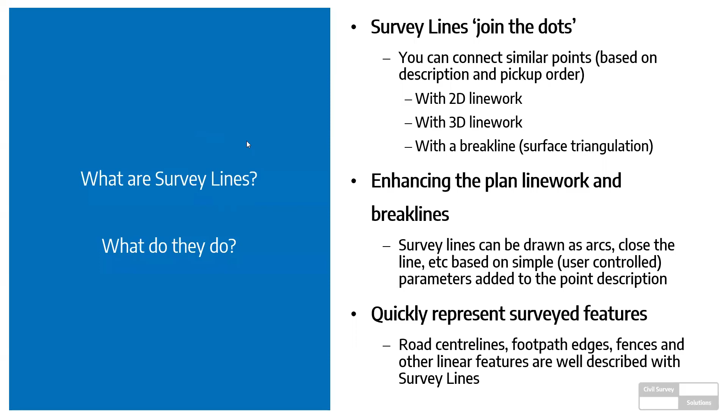Okay, so just moving on with this PowerPoint, I've got one more slide to show, and then I'll get in and show you the toolkit. In terms of importing survey data, the process for doing it in Civil Site Design is similar to what you would do in other software.

You have a point file, which is coordinated geometry with normally potentially a point number, an easting and northing, usually elevation, usually description. You may have other fields. We have a tool to import those points, and you basically tell the software how you want to configure or read in the information. Nothing unusual if you've imported points into Civil 3D or Stringer Topo even — it has the same sort of setup.

When the points come in, they'll be represented on different layers. They can have different symbology, and I'll talk to you briefly about how that works. Essentially what we're doing is letting you create blocks of your own choosing. They have attributed text, and we're just setting up a mechanism to populate that attributed text with the real properties of a point. Once you've got your points in, if you're looking at building existing terrain data, the thing that's missing really are the break lines and the line work.

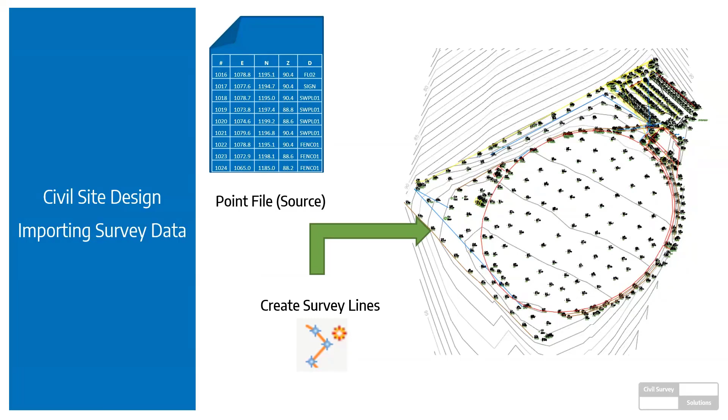So the next part of that puzzle is to create survey lines. What this will do is look at the codes—there's a code set for you to choose what you want based on the description—and then it goes through and makes those connections for you. There's a bit to talk about with survey lines on how you can configure and rearrange the line work if it doesn't work, getting rid of overlaps and that sort of thing.

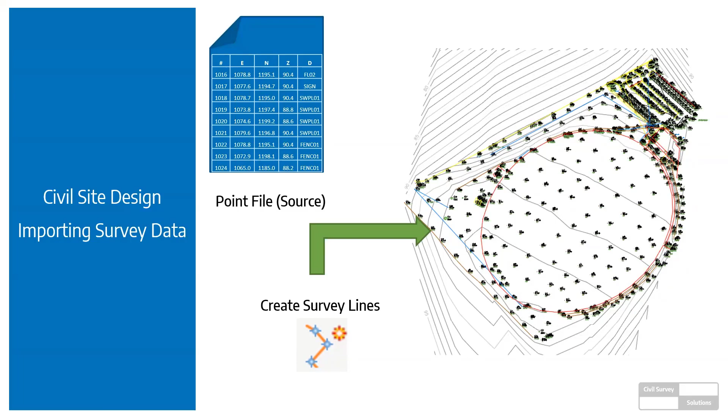Coming out of that, the survey lines, when you make them, become 2D polyline, 3D polyline, and breakline. So the other part of the equation is you decide that this is a linear feature you want to include in your terrain. That's what happens in a survey framework to build an existing surface.

When it comes to design, the same sort of rules can apply. Civil site design points can be referenced to your design elements, so you can actually link elevation information to a road centre line or a daylight batter in code. You can then have that information updating as you move your main design around. But then you could put that in a surface, create survey lines, and add them as break lines.

So I'm going to talk to you on two fronts. One is how you would bring in a coordinated survey and quickly set it up so that you can go and design. And then I will show you some of the uses of civil points from a design perspective.

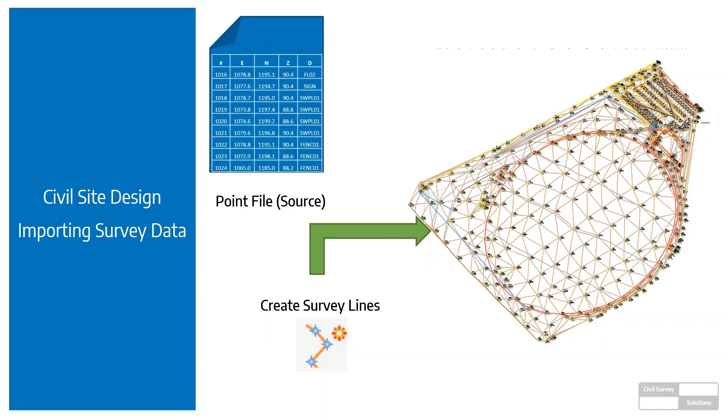Okay, so today I'm working in Civil Site Design Plus, which is inbuilt with AutoCAD. The functionality you see today is exactly the same as what you would see on BricsCAD. In Civil 3D, the tools are absolutely there—they're sitting in a tab called Site. So instead of having a tab called Surface and Alignments, in Civil 3D you have a tab called Site, and you will find the same in there.

I'm not sure if Jonathan wants to say something to me. No, that wasn't me. So wow, someone else has the power—someone else has joined the session. So yeah, no, that was a mistake.

Excellent, all good. Okay, so what we're going to do—we started with a blank drawing. The only thing actually in this drawing are some layers, and really all I wanted to do is preset some colors. If you've looked at any other Cogo point import process, you have the opportunity to normally control display based on putting points on different layers based on their description.

So Civil Site Design points work exactly the same way. All I've done here is create some layers. If layers don't exist and the software wants them, it will create them for you, but it will not give them color—they'll be white. So what you'll have is a bland looking survey, but it will create layers as it needs based on the setup.

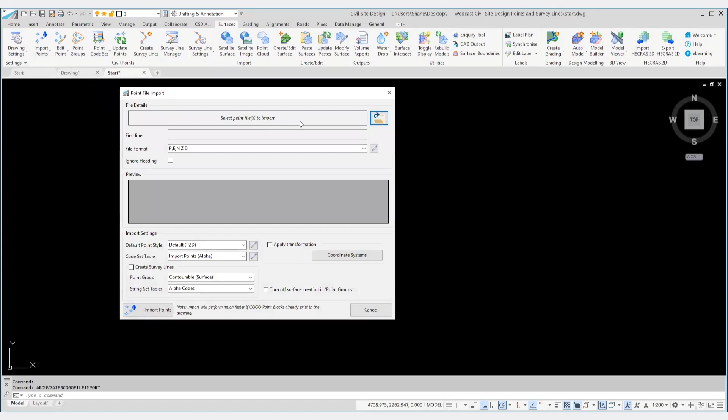When you run this command, the first thing we'll do is find a file of points. This is a fairly traditional file that I open with Notepad so you can see the structure. It's laid out as point number, easting, northing, elevation, and description, all separated by commas.

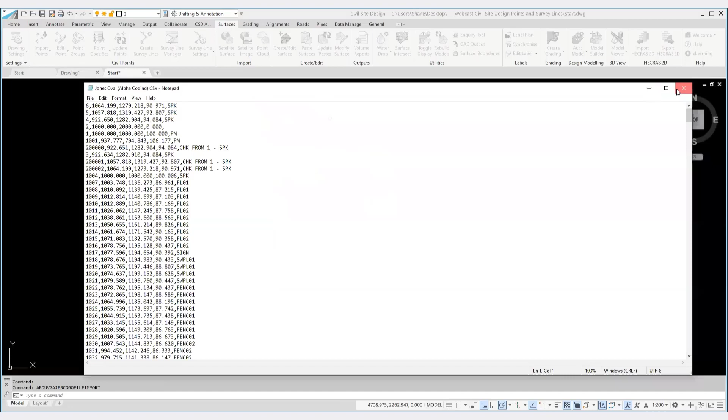So what we're going to do is grab that file. It doesn't have a heading, so we don't need to ignore anything in the file. It actually shows you what's on the first line, which gives you a feel for the framework.

The first thing to know is that when you import a file, you actually set up a file format. It's here that you tell it what each column in the file represents and what the separator is in that file.

If we had more information we wanted to pick up, some attributes, we could simply add a column and then pick what information that column represents. I do have a manually created attribute here called diameter that I could fill into that field, which would then go into the point information, which I'll talk about later. You basically get to decide your columns of information and how you want to feed that in.

This format does have a dual purpose, one of the gotchas to know. You can create formats for importing and outputting data, which is normally this sort of structure, and you can also create formats for interpreting the description of a point.

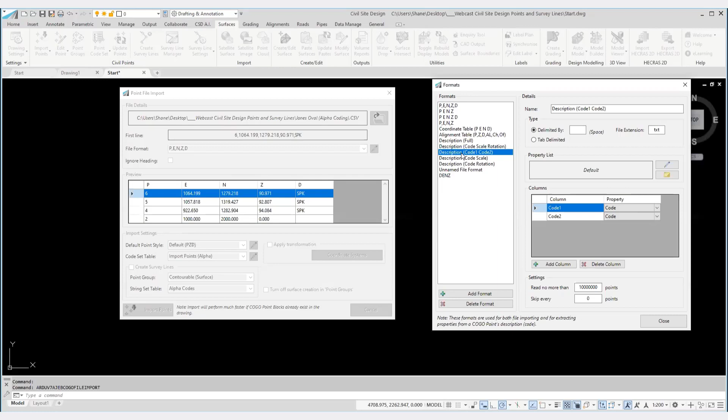So when a point gets pulled in, it has a description. That description may represent two codes of information, or it may represent a code and then a rotation or a scale. This basically lets you interpret the description and how to use that.

So I've got that, and I can see the structure looks right: point number, easting, northing, elevation, description. Then when you bring the data in, you get to pick a default point style, which I will quickly overview here and maybe talk more about later.

It's saying that I'm missing some layers. That's good - a point style is how the point looks. So when you create a point style, you pick a layer for it to go on, which you can override further down the stream.

You can also decide on the block you want to use. The block is really important because this block is your symbology and also the text that you'd like to have with the point. Now that text could be standard text, but if you create attributed text in the block, then you can do more.

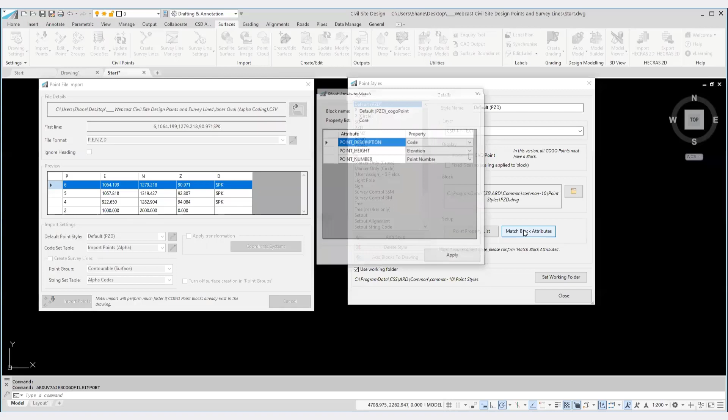You come down here and match the attribute with the property of the point. This is the key ingredient here of why, when you bring the points in, you get the code, the elevation, the point number, if we're using the star. So that's sort of the glue that brings the point representation together.

The point property list is a really interesting area where it shows you all the properties for that point, and you can see that here you can add your own properties. So if you want to bring in random attribute information to show on the plan or put in a table, you could basically call in a custom property element, and in here you fill out the information for it.

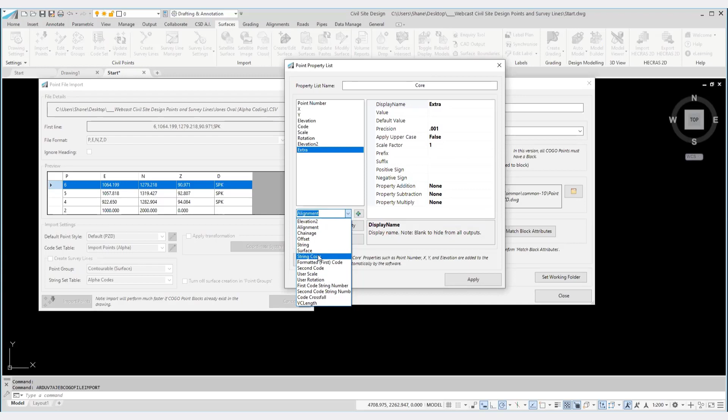We also have standard information that we understand and know about for a point, and that can also be added as information. Once you have the property information you might want to store, you would then assign that to the attributes. Points can have a fixed scale or scale based on the drawing.

Most of the symbols in here are actually scale dependent, which is going to come from here. But you can have fixed size, and then, as well as having a block of information, you can also add a CAD point. This is important if you want to put those points into a surface.

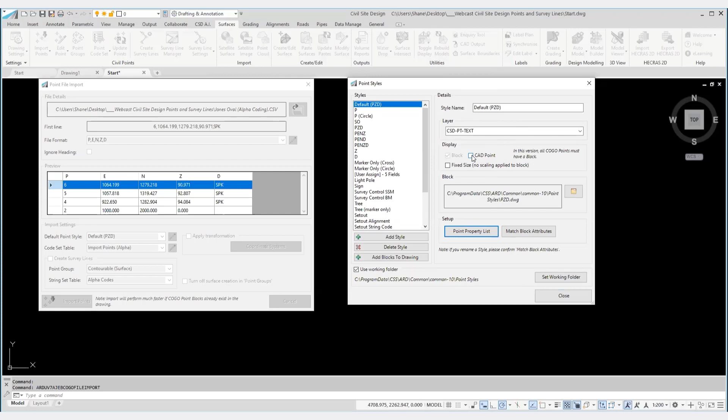At the moment, you would do it by calling in a layer that contains CAD points, so you would tick that on if you wanted to separately add it to a surface. Okay, that's enough discussion about that.

So the other part of the glue that brings all this together - and I did say I'd create and then talk about settings, but what I'm actually doing is walking through each of these settings commands, they're all on this central form - the code set table is the final bit that brings the pieces together.

You can make your own tables. What this says is: if I bring in a point with description starting with capital B, capital L, and the asterisk meaning anything after, I want it to go on this layer, I want it to have this particular point style, and this is the interpretation of the description.

Okay, so if we have a look down at, say, tree, we'll see down here TR, you'll see it's a different layer, a different style, a different interpretation of the description. Okay, so you get to make these.

When you start a drawing, they're local, so whatever you do here is affecting just the current drawing. But if you click on Set as Global, you can send them up into the settings, and that becomes your defaults from later on. You can also pull in the description key set from Civil 3D as a starting point, or a stringer SDB file could be used to just initialize this.

Adding a new code is really easy. I'm going to add one called XD for Extreme Design, let's say. I go OK, that falls in the list here. And then what I can do is choose how that behaves. So I've also got, it seems I've got the station, a set out point as well. So I'll set them both up now. This is going to go onto a layer called PT Design.

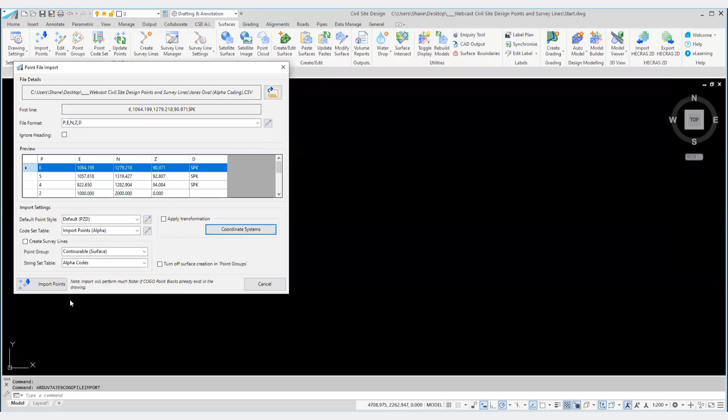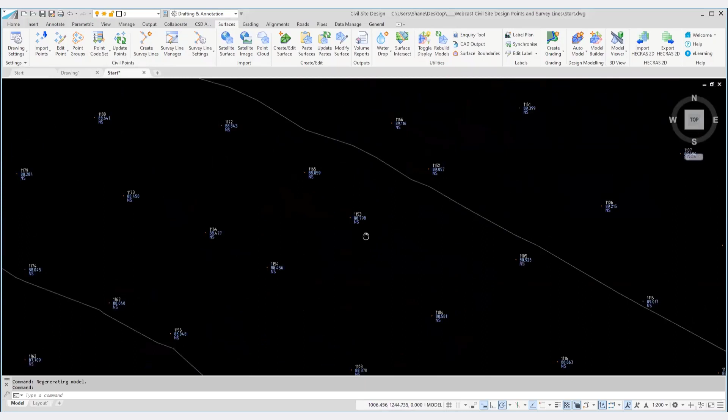You're going to go import points. Okay, so I now have point data in and a surface built. So I'll explain how that surface comes to be. This is a point, essentially when you click on it, it resonates as a block. So that block has attributes on it, and that's what we're sort of flicking through. We're inhabiting those attributes. With the point, you can move it.

We'll update the surface. There is also a grip that you'll see in any AutoCAD-based platform, and you can actually go in and edit a COGO point. So it's in here that you could see the attributes, the point number, the easting, the northing, the elevation, and you can start plumbing in changes here. And once you go apply changes, you'll see that sort of resonate through the system.

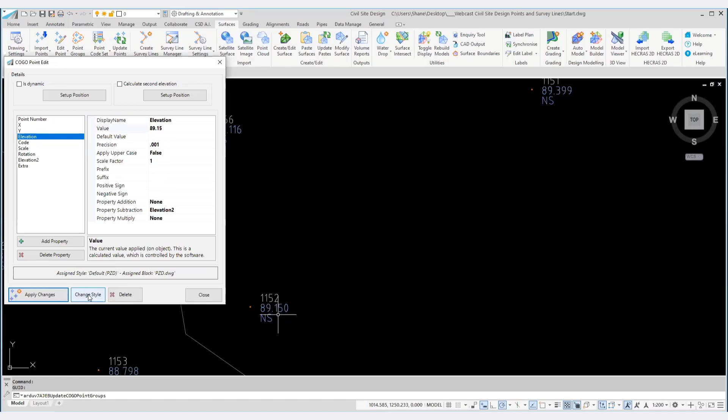At this point, you could also change the style. So if the presentation style wasn't what you expected, it says it's using default PZD, you could come here and change that style. Okay, I won't worry about doing that. So that's sort of the infrastructure of the points. If you delete one using AutoCAD, you do delete it and it disappears out of the system.

Now, the question to ask, once I just show you, there's an example of a tree. You can see you get different symbology based on the different codes. So what we do see, and rotation is just AutoCAD if you want to rotate your marker and text.

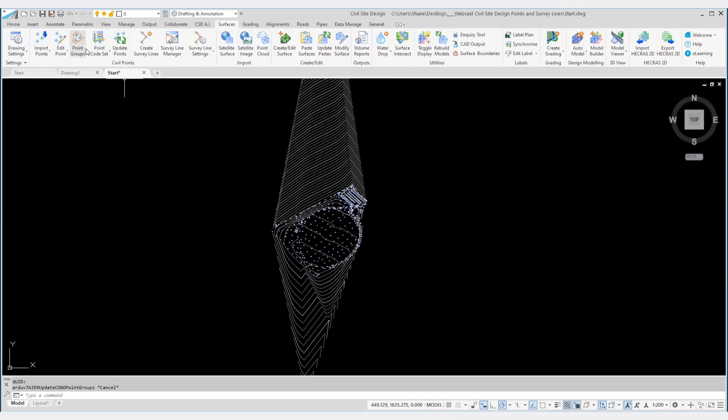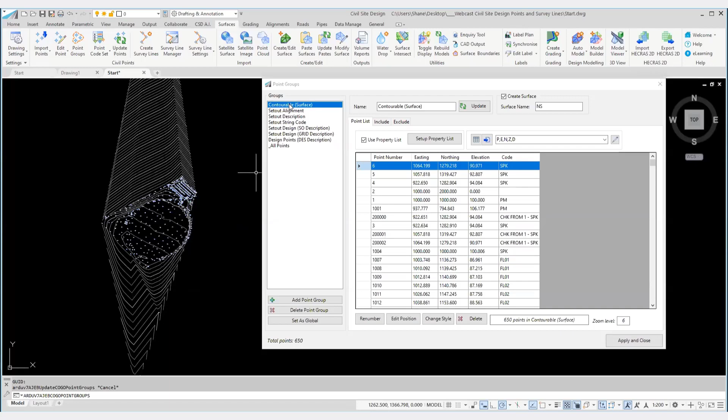What we do see is that there is a surface here, and this comes back to point groups. So what the point group allows you to do is to decide on how you want to collect the points together as common points. You either create a group for building a surface, or you create a group for categorization of the points. So trees might go in their own group, set out, design might go in its own group.

Now, the reason why we're getting a surface here, and if I just click on it, you'll see the natural surface. We can toggle the contours and triangles on and off, water drop, all that sort of stuff. The reason that surface is being created is because within the point group, we're directing it to create a surface. Okay, so that creates a civil site design surface.

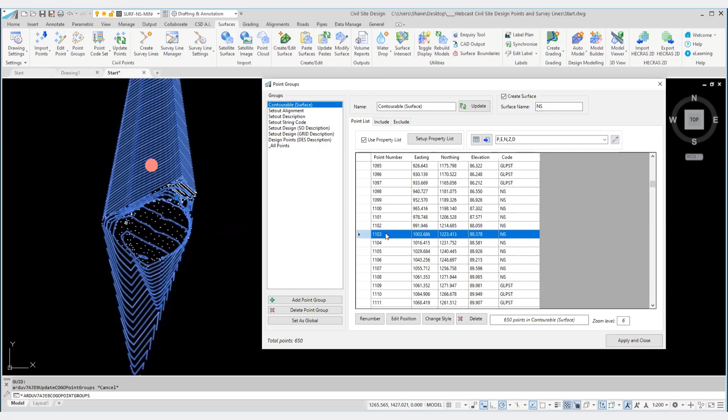You can see here the list of points. You can click on any of them and jump to them. You can edit their position and renumber them here, change the style. The reason the point group is here is because we said include all points, and then under exclude, you exclude points can be based on point number, can be based on code, elevation, coordinate, and you can actually set a range. Okay, so number between blah and blah.

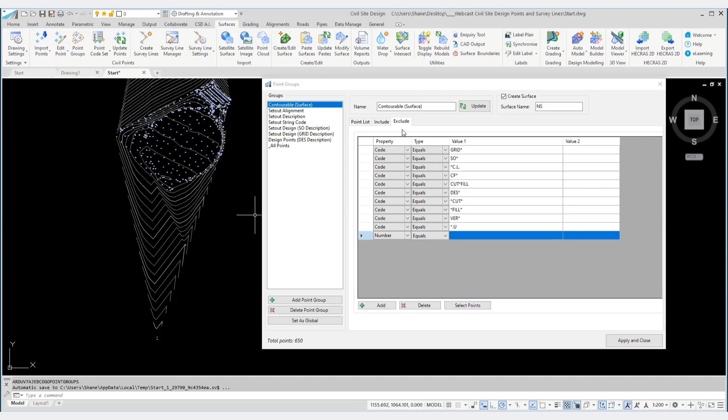If you wanted to exclude individual points - say I don't want these control points in the surface - I can just go select points. I do a window around these guys, a window around this one, press enter, and what it does is it flags each of those points as excluded. Once I update, I'll only be building with those points.

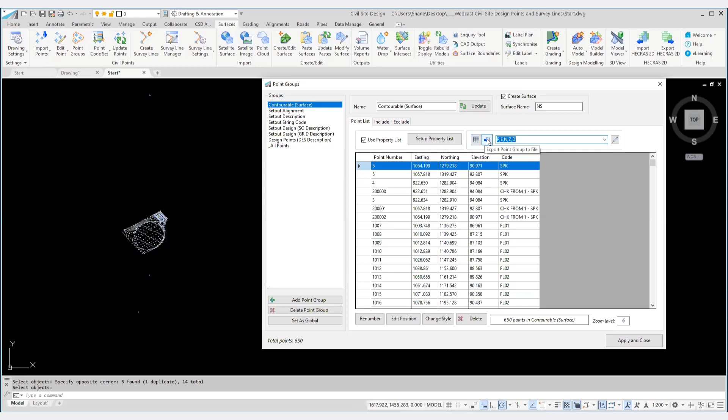If you ever create a point group yourself for categorization or set out, you want basically a table - the table creation is right here. You can click this and dump a table in AutoCAD or in the drawing, or use this to push it out to file, and this is the format method. So you pick the format of the information you want in the table or going out to file. You'll see here there's a set out for anything with a description of SO, and they're going to go into a sort of design group.

I'm not building a surface out of them, but I might decide that I also want anything with that new code I made called XD in this group as well. So when I create a point with description XD, it's going to fall into this group, from which I could then publish output tables or otherwise use.

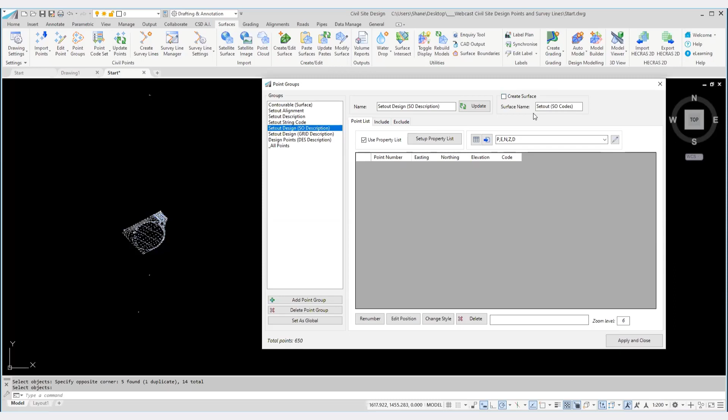You can create surfaces directly from a point group - it's sort of a back end into the surface manager. Otherwise, if you wanted to cherry pick the points to be made into a surface just by picking, you're best to create a CAD point using the point style. So if we think about point styles, which I did open, the SO point style is also going to create a CAD point that we can basically build into a surface. I'll show you that when we do design.

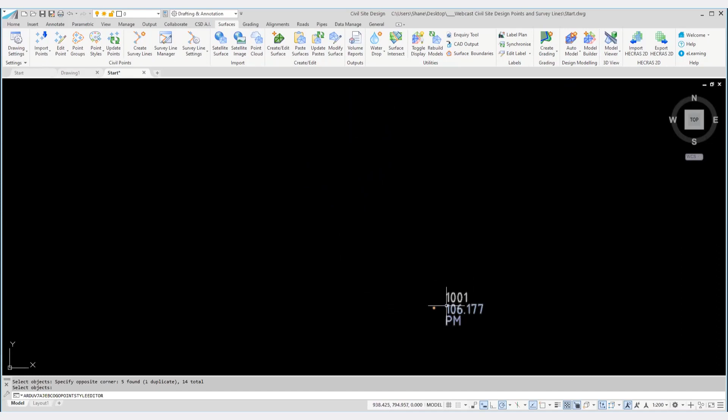One of the problems with this arrangement is that the control points are assumed. If you look at the coordinate tracker down the bottom, I'm hovering around 1,000. There is a control point file where I know, say, point number 1001, I know what the real coordinates for that point should be. So what I want to do is a transformation based on that.

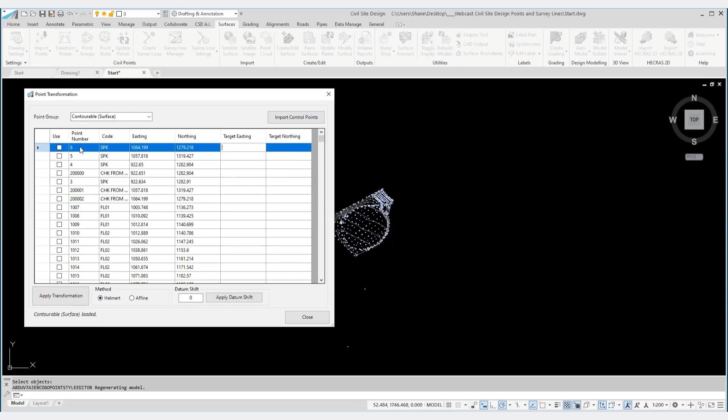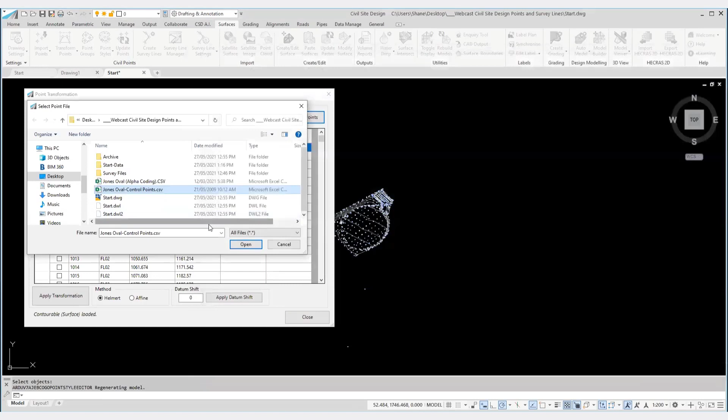Now, to shortcut that, I'm just going to import a file, which is basically comma delimited - point number, easting, northing. That's all I really need. So I'm going to import control points. I have a file here. If I edit it with Notepad, it's popped over here, and you'll see point number, the real coordinates, the real elevation. So all I'm going to do is grab that file, then interpret the file, and what it does is just highlight those points that are actually affected. Then I click on Apply Transformation.

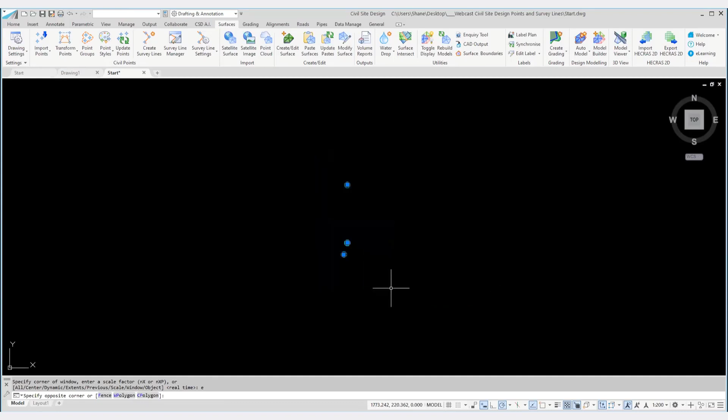And the end result is I'll have the data all moved. Obviously there's something behind this - those 3 points I pulled out of the point group, those control points didn't move. So you probably want to pull the control points out of the point group before you've done a transformation. Trick for young players there.

But now that the data is correctly oriented, if I went to the satellite image and picked a spot here, the image would turn up in the right location, because I'm now geo-referenced back to control points. So that's a sort of summary on the point side of things.

Let's have a look at joining the dots by creating survey lines. Now, we've got descriptions here. We've got PB, whatever that means. We've got shed, we've got natural surface points. We've got FENC for fence. We've got DRN for drain.

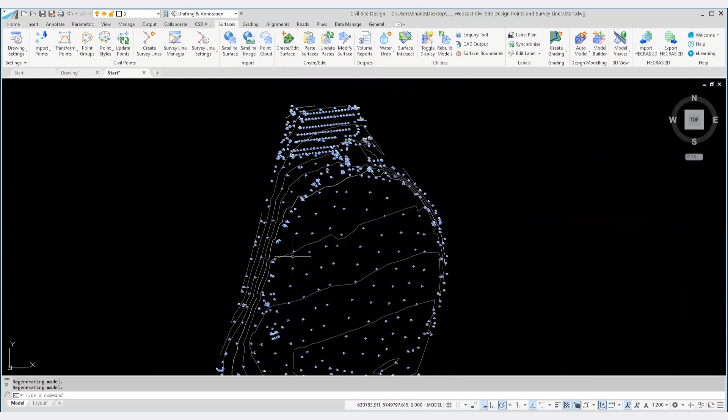How do we want to join these points together? Because we need to add break lines the way the survey was intended. So that is controlled from the survey line settings. In here, what you have is a very similar framework that you had for your point code set. You have a description, and you decide if you want it to be a break line, a 2D line, what layer, 3D line work, what layer.

So you don't have to have 3D line work in order to create a break line - they're actually treated as separate things. The break line will drive the surface. 2D line work and 3D line work are otherwise useful to you, but you don't need 3D line work to build a surface. The break line is a separate tick box.

If you look down here, you'll see a whole bunch of items that I didn't want to join. You'll see here that the DRN code is going to give me 2D line work, and that's it - it's not going to go into a surface. But you basically would set this up here. This is the standard list that we have in the software, alphanumeric. Very easy for you to create a new table, very easy to add new descriptions and then say what you want to do.

There's a very interesting option here about how you join the strings together. We let you decide whether you need a string number or not. So at the moment, anything that says DRN would get strung together. If I tick this box on, it would omit - not join DRN - it would look for DRN1, DRN2, basically a string number associated with that code.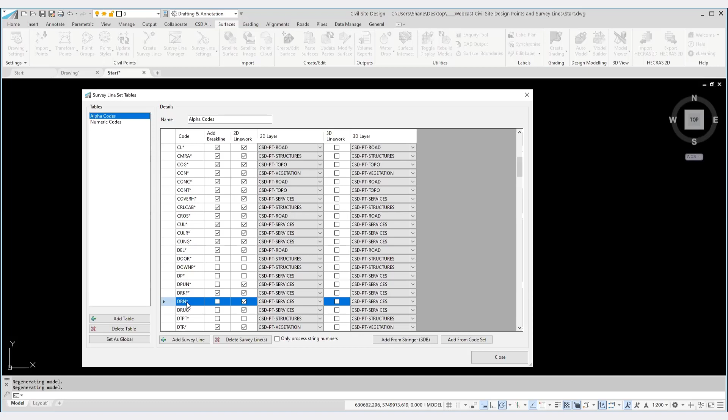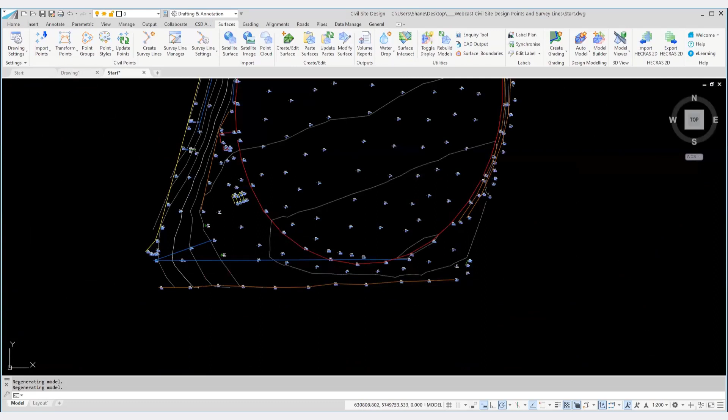I'm going to close that. So all I do to bring this together is click on Create Survey Lines. You pick your point group, you pick your table, and once I go Create, the software then creates that line work. That line work will move when the points move. It has certainly added break lines. If I click on that surface and choose to show the triangles, you'll see that there's defined triangulation now running along each of these features.

Now, everything's not perfect. You'll see that there's some things that have been joined that you might not want to join. So what we're going to do is go through and have a look at carving that stuff out - how do we sort of fix this survey up?

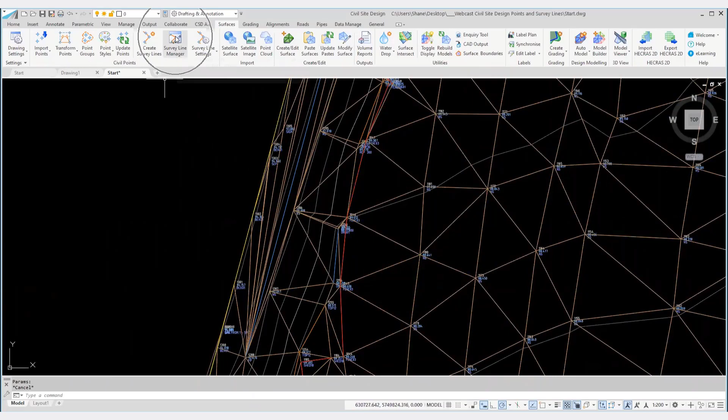So if you want to tidy up your survey lines, the temptation is to move these 2D polylines, but it doesn't really get you a permanent result. What you do is you open up the survey line manager. It's in here that you would then interrogate the survey and start making some changes.

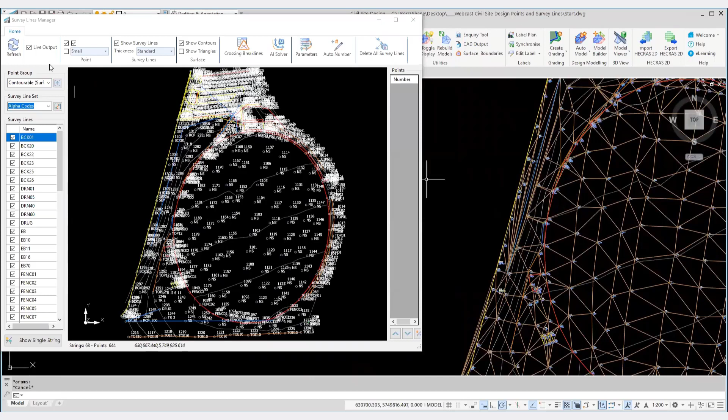This is a window that's completely resizable. Obviously you can go on a second monitor to give you some breathing room - I'm doing everything on the one monitor. Basically what we do in this window is directly written across to the drawing, unless we decide that we don't want a live output. So this window is an opportunity for you to look at the survey again, but with a focus on the line work.

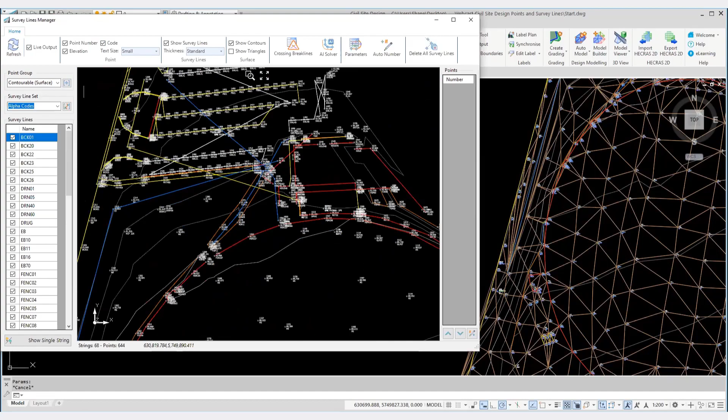Just up the top here, you choose what information you want to show on the points. You choose how big the text is - the text does resize as you zoom in and out. So when you're this far back, it looks nested; when you get in, it tidies up. You can choose to show or hide the survey lines, and you can also turn on the triangulation of the surface so you can see the break lines that have come into play.

So how does this work? On the left is a list of the picked up survey points that have been joined together to make lines. You click on any of those and see them. Anything that self-intersects actually highlights with a different color - it's this one called PB21. When I click on that and zoom out to look at it, I'll see as I roll along that there's an icon here to indicate that there is a crossing break line. So that's something I would like to resolve.

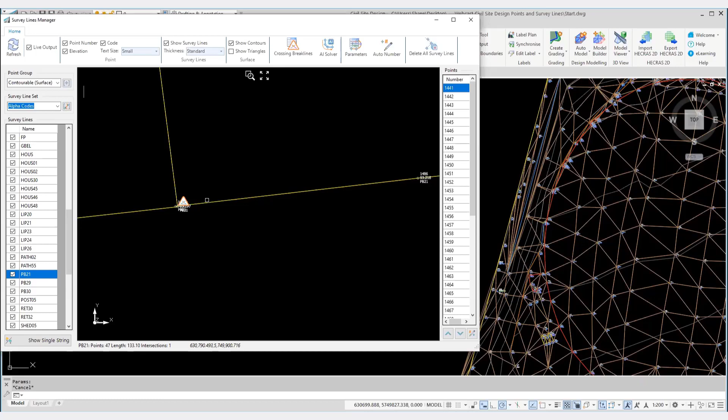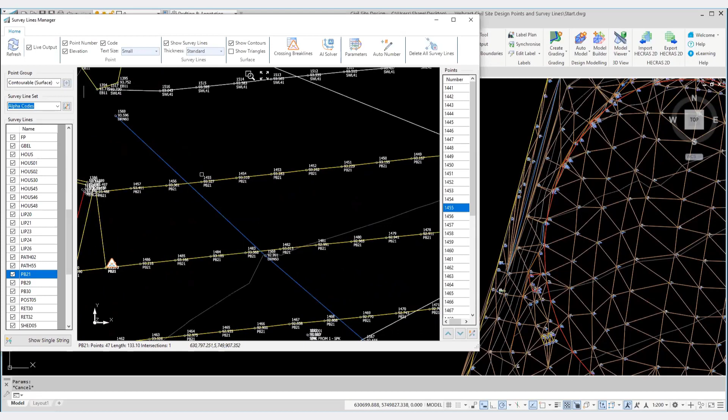As well, when you click on any line here, you can also see the way the point numbers have been joined together. Now, in the Survey Line Manager, we don't renumber the points, but you can choose to join them in whatever order you want.

Instead of renumbering all the points, the survey line point number order gets switched around. You can actually do that manually by using these up-down arrows. It's a very slow way to do it, but you certainly could.

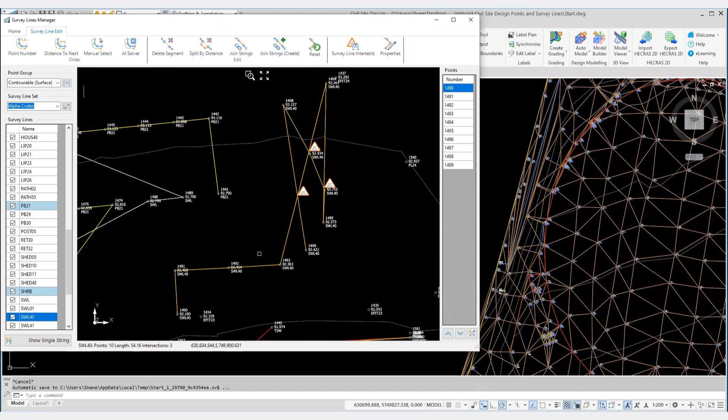Okay, so let's start fixing up survey. I'll start here - classic issue. Have a look at this survey line. When you click on it, it shows that it self-intersects. Ideally, what we want to do is start at the top end here and work our way down. So when you click on a survey line, we open up controls here for changes you might want to make, and I'll get this in the drawing so you can see it happen.

So you could basically reorder this by picking point numbers, reorder distance to next, manually select, or use the artificial intelligence to do a solve. But all I'm going to do is go reorder distance to next. I click on the start point, and then it reorders that. You'll see there that's updated the surface in the background.

Now, I do have an implied curve here. If I click on this line work, I can see the point number connection 1494, 1498, 1497, 1496. So I know the order of those points, starting down at this end and working up that way. So what I can do is decide to put in a fillet, right?

I can click on this point or this point, and say I'd like to start doing an arc. The software will then fillet from that point onwards - I think I just did it in the wrong order, didn't I? Let's turn that to line. So if I click on this point here, I'm going to start doing arcs, and I'll stop arcing at this point here. So basically you can instruct the line work to behave differently.

Okay, that's really what this is letting us do. You click on any point and remove parameters. The way the parameters work is actually up to you. We've got it triggered based on the code having a dot, a full stop, and then a letter. You could have a comma or something else if you wanted.

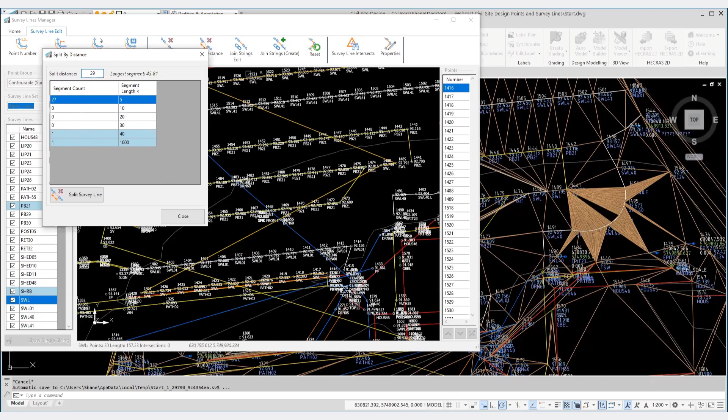So we're just touring the job here and having a bit of a play with some of the tools. You can see here that there's some lines here that are quite long, and I'd like to quickly split them out. Doing a split by distance is a quick way to get rid of them. You can set up your own checks - it says there's one line between 30 and 40 meters, and one line greater than 40, less than 1,000. So if I said get rid of anything greater than 29, you'll see it will get rid of these two segment lines out.

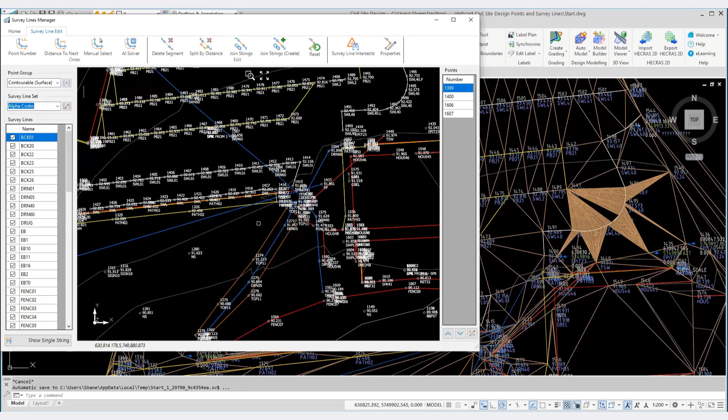I think I might have gotten my distance a bit short there. Let's just go again, I'll just delete that directly. So you can just pick and delete. I'll do the same thing with this line - split by distance, I'll make that 19. And it'll then automatically carve out the long lines. That's writing straight back to the drawing for me.

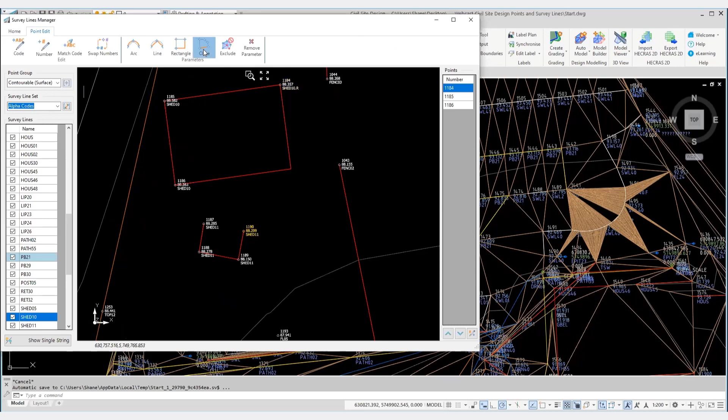If I look at some other classics here, I've got 3 points and there should be 4. So if I click on the line work, or click on the points, I could put a parameter on to make a rectangle. I can click on this one, put a parameter on to close the string. So I can work my way through.

Let's say I wanted a gate in between these two points. You can actually do a join string where you create a code to bridge the gap. So click on that - it says select COGO point. I'll call this gate 1, and I'll have a new code in here, right? And that will also drive a survey line out here as well.

Okay, so hopefully it gives you a bit of an idea about how this works. Any self-intersect survey line intersection you want to pursue, you can basically turn those on and off with that highlight.

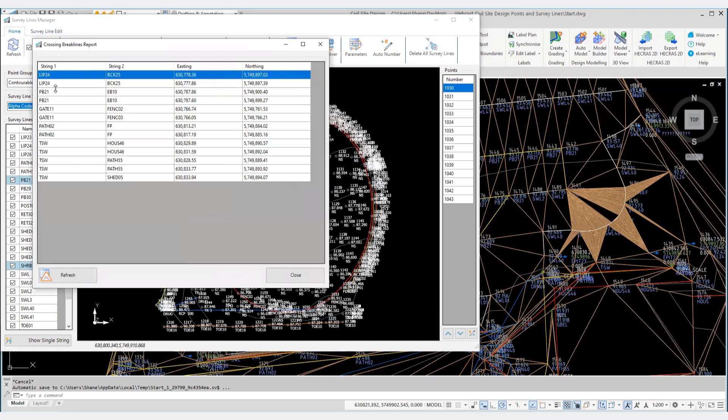There is a crossing break line option, which will give you a list of all the break lines that cross. This is about break lines crossing, not just the survey lines, but the break lines that make the surface. That can help you decide how you might want to deal with getting rid of overlapping information. Not a perfect survey, but you can see the process you go through to tidy that up.

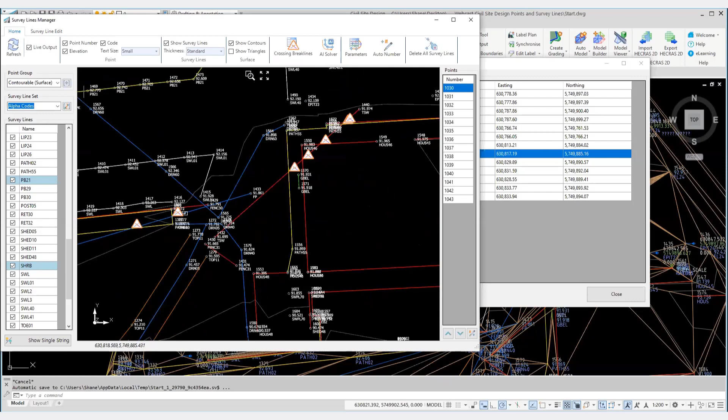All right, so that's really what survey lines do. That's really what civil site design points do in the context of bringing in survey data, from which you can then go ahead and knock out your design.

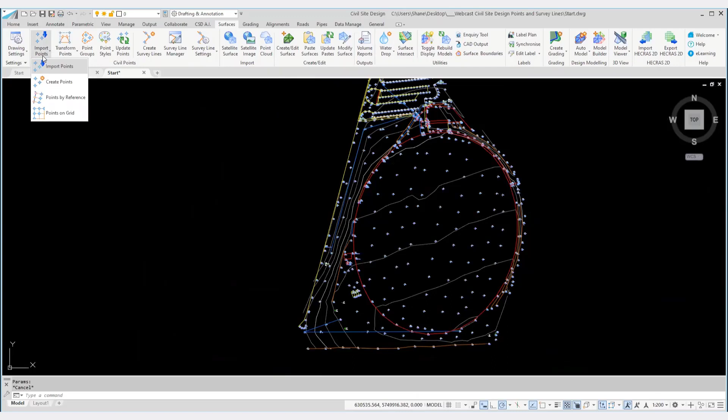Okay, so let's talk about civil points as a documentation tool, an output tool. One of the classic things you might want to do with your COGO points is to create them for set out, or create them to put into your design. So what I'm going to do is quickly design something, just a real basic thing - just a polyline.

So what I'm going to do is draw a detention basin here. Makes no sense in the real world, but I'll put it here. I'm just going to turn this into a basin - let's call this one basin. I will put a template on it, pick an elevation, lower that a bit, and create.

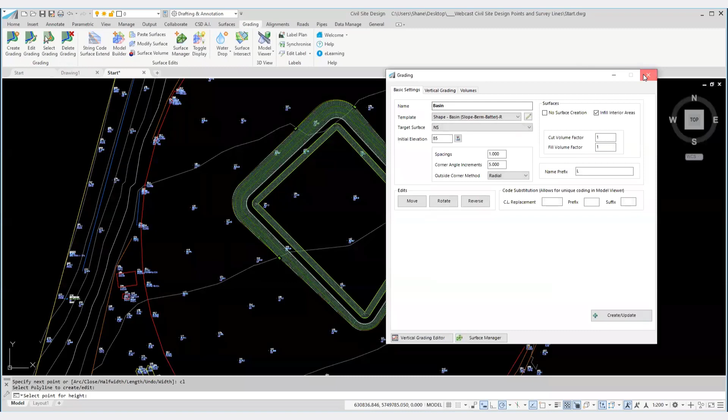So I've now created a string. It could have been a road design, could have been anything I wanted, from profile string to whatever, kerb string, any of the strings. But what I want to do is show how you can use the civil site design points as a form of documentation.

So what I'm going to do is go back in and use point by reference. So create points - I'll just quickly walk through this. You give it a code. You can basically pick any location you want on the plan, but you can also dynamically link to other features.

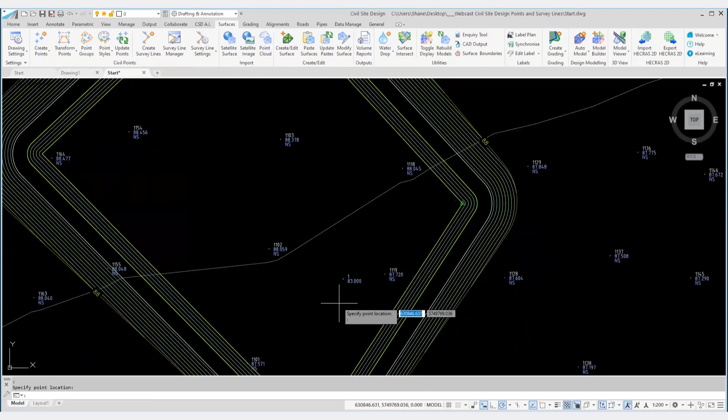And that's the classic thing I'm going to do with points by reference. But here's me doing something manually, right? So I could just go, this is 83. I basically want to pick this style - I want to pick SO so that it has a CAD point, and I'm just going to drop that here. Okay, so that point has a description. It has a presentation style.

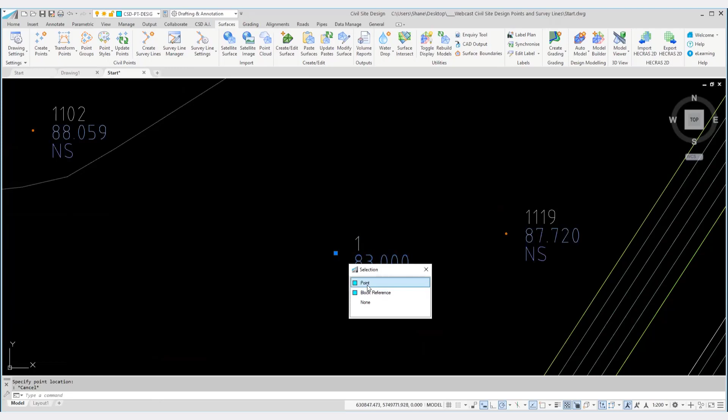If I wanted to, if I used a good description, I could join it together with the survey line manager, and then use that to influence the surface. For me to use that in the surface, if you've created the point and included the CAD point option, well that CAD point lives on a layer. So if we go to the surface manager, I can pick that grading surface, and under the point inputs, I can pick that layer, add it, and build.

So what I've now done is built my design with a point in play, managing how that all works.

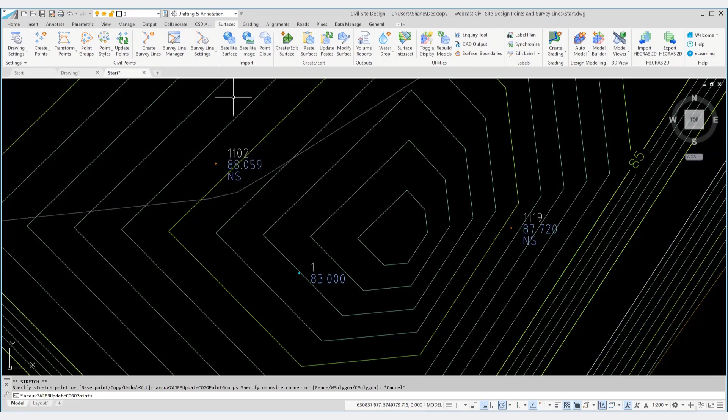Shane, I've just had a question which I think you've just immediately answered, but one part was around using the line manager to change or swap edges or make changes to the surface itself, or the design surface itself. Really, I think the answer would be that the line manager is there to manage your break lines for your surface, but in respect of managing break lines for a design surface, I don't think it's really been set up for that, has it?

Well, yes and no. So if I went in here and let's just quickly nub something in. So I do have these - remember I was going to create points with description XD, right? So I'm going to go and say, hey, I want to connect those points. And I won't worry about break line because, as you say, adding a break line is something you do from the surface. Basically I want to add these later.

I'm not going to bother with 2D line work, but I'm going to create 3D line work, and I'm going to pick what layer that goes on. So I'm going to put that on, I don't know, something innocuous, exec view, right? Okay, so I've done that.

So what I'm going to do now is create 2 points with description XD, right? So I'm going to go create point. I'm going to give this an elevation of 82.5. I'm going to call it XD.

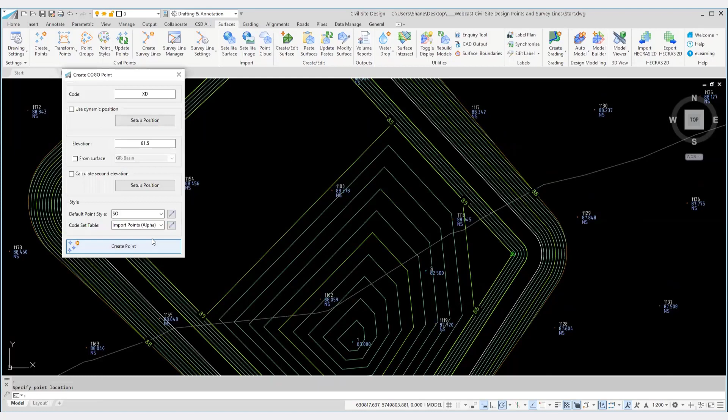Okay, so I've got 2 points made. It's doing something a bit unusual with natural surface because I didn't pull it out of the point group of natural surface, so I'll just pull it out of here. Exclude anything with code equals star XD star. That's okay, so it's not part of the natural surface.

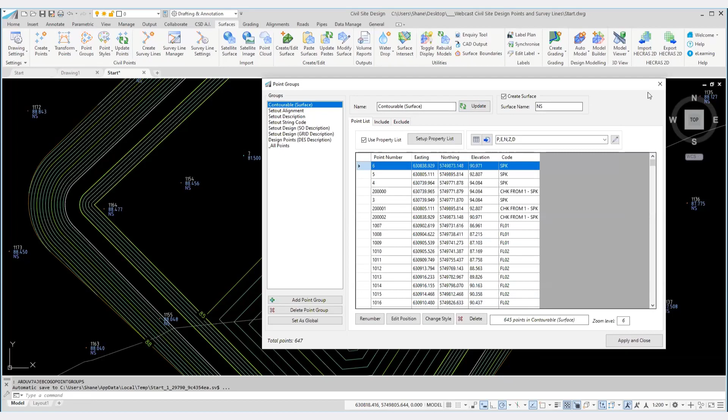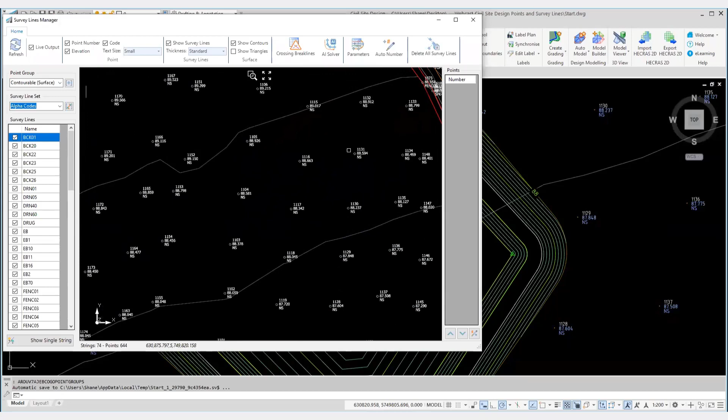But if I just run create survey lines, it should join them together for me. Let's see if it does it with survey line manager. So I should have in there. What I'm just going to do is cheat - I'll delete all survey lines, and then rerun this tool just to get it to do its business.

I guess the main part of the question is how much of this can be used with design surfaces, as much as there's more the survey line manager being part of editing design surfaces. Well, I guess I'll just talk you through what you do.

In the survey line manager, when you create design points, they should all connect. So we've got XD here. On the assumption that connects and does its business, basically from that you then have 3D line work on a layer. Once you have that 3D line work on a layer, you go into the surface manager and go to breaklines, and all you do is call in that layer, and that builds into the surface. That would do the process.

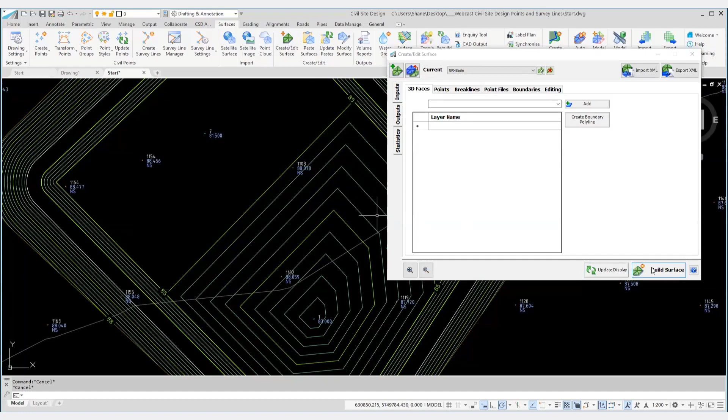Just with regards to making points a little bit more dynamic, what you can do - I think those points should, those points will pull in with that change.

Just to finish this off, what I want to do is show you how to reference points to other things. So you see here points by reference. What you can now do is basically link point position and elevation to other design elements.

So what I want to do is go around the perimeter of this and go out 2 meters, and basically create points that sit, let's say, 0.5 meter below the center line here.

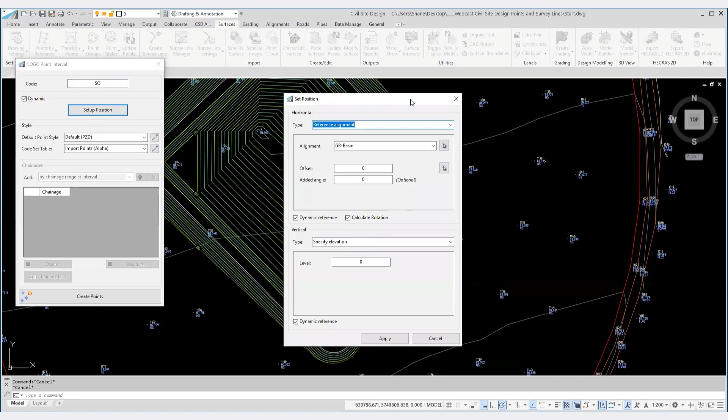So to do that, I go to set up position, and in here you can basically say, okay, what is the horizontal location? I want the horizontal location to come from - it could be the string code, it could be the alignment. I'm going to get it to come from the alignment, and I want to have an offset of 2 meters to the left, -2.

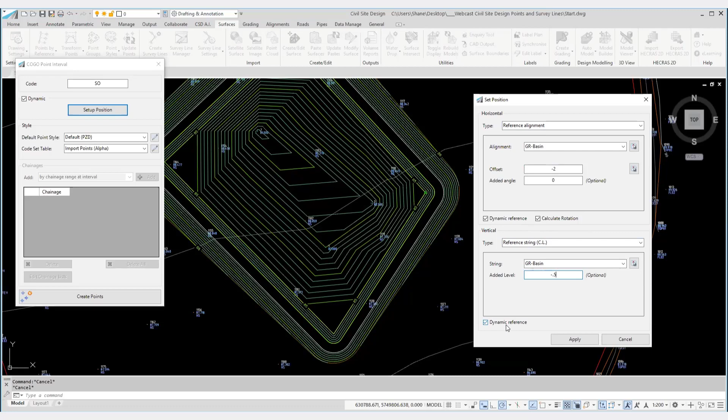You can also set what happens vertically. So vertically, I want to pick up the string center line elevation from the basin, and then I want to put -0.5 meters on it. And you'll see this dynamic reference - so what I'm doing here is basically saying, let's create some points that sing and dance based on another element.

And then here you add chainage locations, so you can basically pick a spot, add over an interval, or use the sections out of the design setup. So what I'm going to do is go chainage range at interval. Let's not start at 0, but let's do them every, let's say, 10 meters. Once I click on apply, it creates a list of them.

I go create points, and I now have a collection of design points with their elevation and position relative to the grading string. So if we think that through, if I grab the polyline of the grading string and drag that out, all I need to do is hit update points, and those points will go and reposition themselves relative to the design.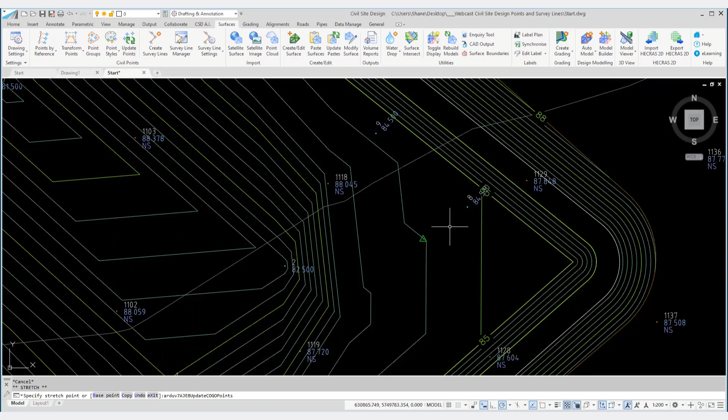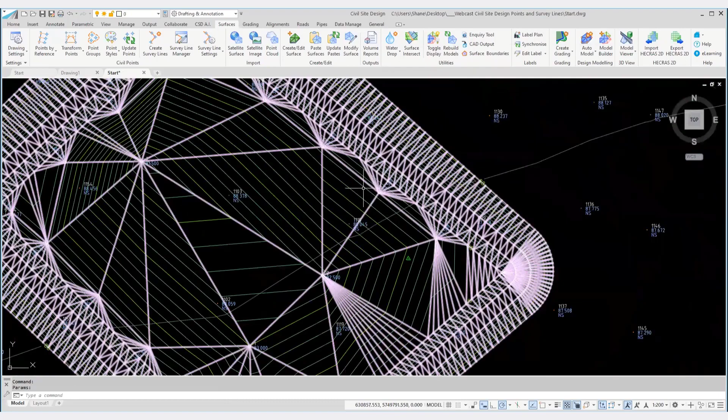So if you think about that for set out, it could be used for set out. I've actually put these on a layer that creates that point on that layer there. So if I just go to the surface manager and build again, I'm actually going to build with those points in mind, so they become design points that get used in the triangulation of the mesh.

Points can be created as elements used to represent surface data, and equally they can be used as elements to enhance your design. We've been asked over many years about putting a low point in a car park, and we've always said you should have a break line for that. But the reality is that just having a low point is just having a low point. You can now introduce those with Civil Site Design points.

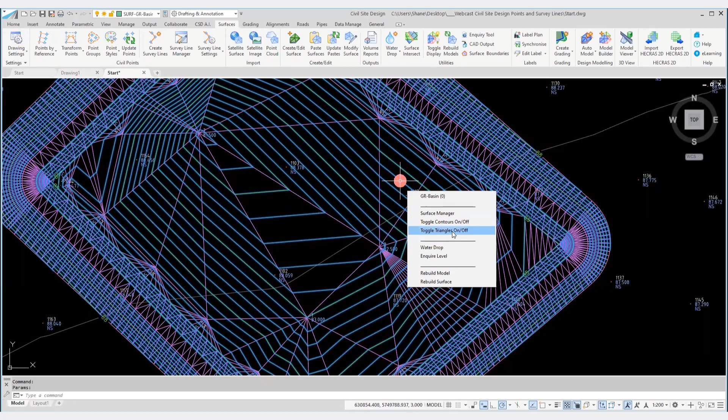That's sort of the end of where I wanted to get to, but to finish, there's a points on grid option. This will create points comparing one or two surfaces on a grid framework. I did skirt quickly over the civil points—there's a bit more to them, like setting up the blocks yourself, comparing surfaces, and adding unique attributes. So maybe we'll do another session at some point on that.

With points on grid, it's fairly simple. You've got a code, you've got one or two surfaces to use. If you're using two surfaces, you want to use a style that compares those—there's one called cut and fill, which takes elevation 1 minus elevation 2. So I could get a series of points with cut and fill. You then have spacing—let's go 20 meters and 20 meters. We'll end up with a cluster of points, but you pick a bottom left point here, top right point here, and then go create points.

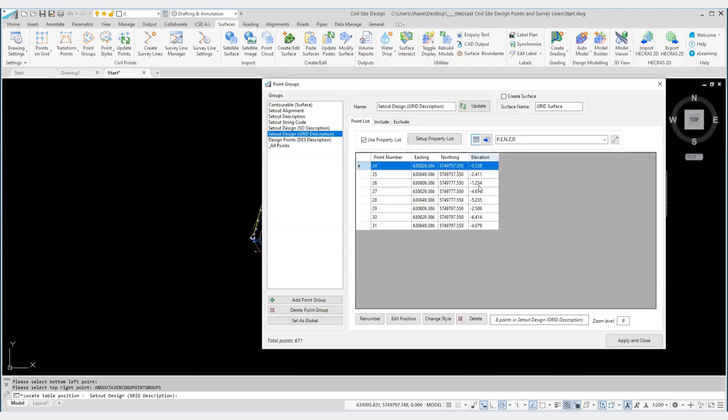You'll see these grid points now represent the elevation difference. This is classically what you might put out to file. You might go to point groups, find the one that picks up points with a description of grid, and write that out to a table to document somewhere else. Out to file.

Hopefully you found that to be a little bit enlightening, but that's really what I wanted to show about Civil Site Design points and the survey line manager.

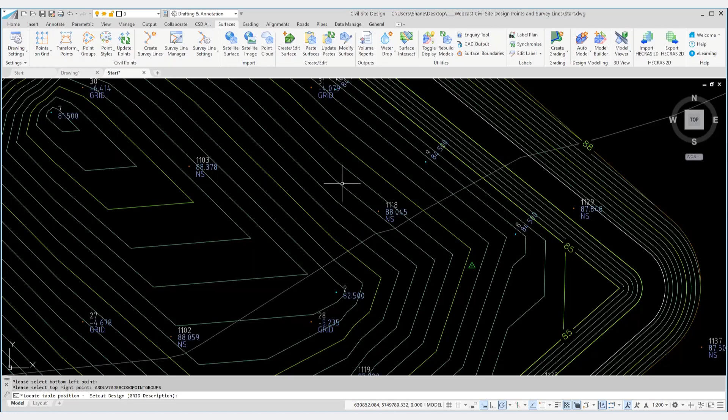Shane, I thought it might be worth highlighting, since you used it a fair amount, how you manage those grips, and that they're not an exclusive part of what you've shown today—they're now part of Civil Site Design. I'm talking about the surface and string grip that we were discussing.

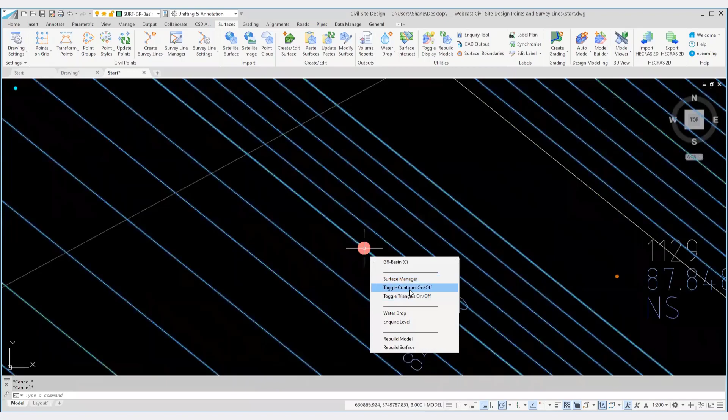With the string grip, you'll see that on the total model. The string grip is your opportunity to grab any line element and get straight up information about it—documenting the distance along, the crossfall calculation, the offset calculation to the previous point. You can grab any particular code, any particular line that we draw as a design, and get that documented information.

The other thing is that if you hover over a grip, you can do something with it. I might create a civil point just on that location by clicking right here. These square grips, you can even move and change the daylighting manually—this is me manually editing the way that daylighting works, or the batter works.

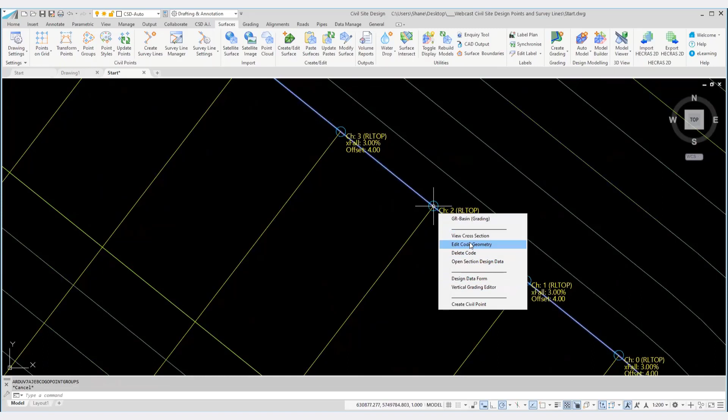You can also come in here and potentially do other things like apply variation, edit code geometry, delete the code, or open the section design data. So we've really given you the ability to click and then hover on a grip and take action on that object. Civil points are part of that puzzle.

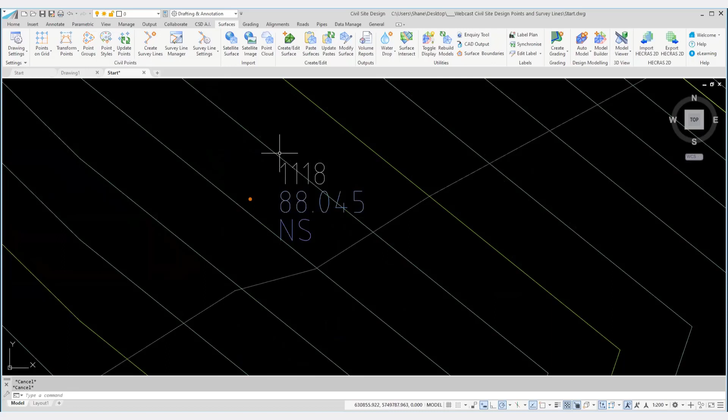If you hover on that little circle grip, you can edit the Cogo point, which I did gloss over earlier. I didn't really talk about the point groups, but you might open up the point group manager from here, or update all the points. Grips are available in any of the AutoCAD-based platforms. We are working with Hexagon to see what we can do about similar functionality in BricsCAD.

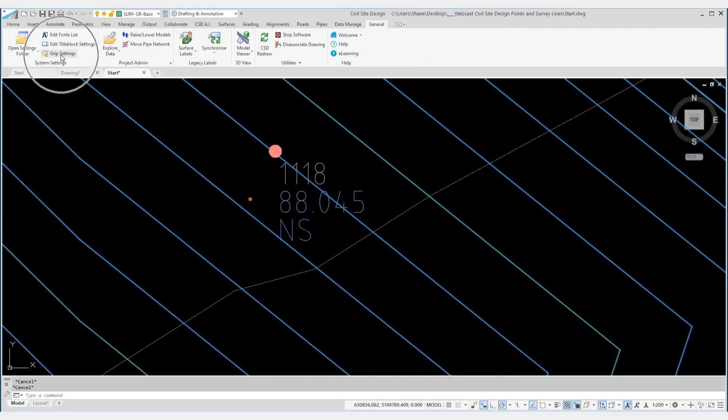Is it worth quickly showing where you can turn these on and off, just in case you haven't got version 19.2 onwards, I think that's when they came out. So what we've done is pop them usually underneath the active drawing settings, also in the general tab—you'll see the grip settings command. Fairly simple: you choose to show them or not, and show them as large or small. For the surface one, for instance, I'll make that small, then go apply—it's really just the size of that marker.

Yeah, certainly if you haven't seen those, I think most people, if you've got the latest release, you'll have noticed them. But if you haven't, well worth going and having a look, particularly with things like running a water drop or turning the contours on and off, or triangles on and off quickly. Just running that process can be really good.

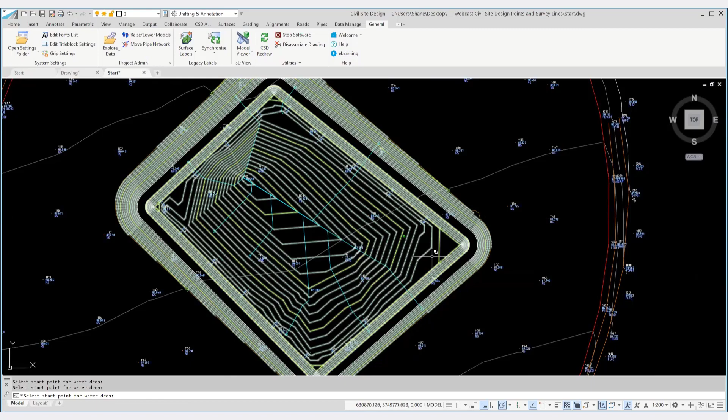It's just really some feedback. So for those of you that have seen this, question 2 is based on the fact that you would obviously have to use question 1, but based on what you've seen, are you likely to use civil points in your projects? Are you likely to use survey lines in your projects? So getting a few responses there, which is interesting.

Any feedback you have on this? If you do start to tackle it and want to give it a whirl, well worth doing. There is a video on our YouTube channel where we've shown you how to incorporate a civil point back to your design and then use auto profile. That's one of the most recent YouTube videos working with civil site design. So you can really get into using civil points with your actual designs, it could be road designers, or as Shane's done there, basin or car park.

Interesting that a good proportion of you are interested in giving it a go, and some of you are not sure yet, which I can understand. This may have been an exploratory viewing of a webinar just to get a sense of what it's all about. So I'll just end that polling.

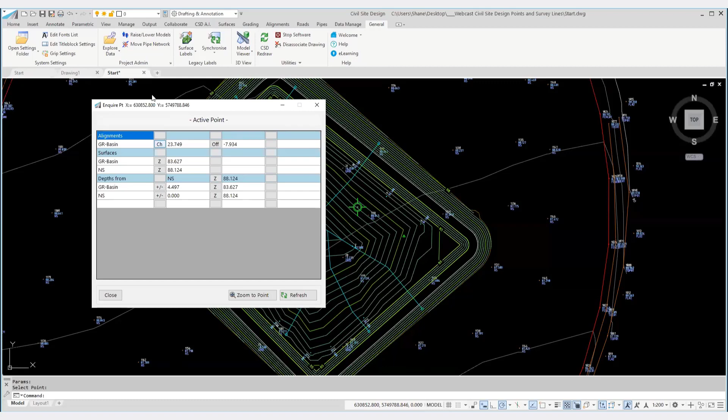Thank you. Shane, have you got anything more to add to that? No, the only thing to add is that we're certainly keen to do more with these points. We have found that they're quite fast for large data sets, so we're looking at opportunities to leverage these into string topo in the future.